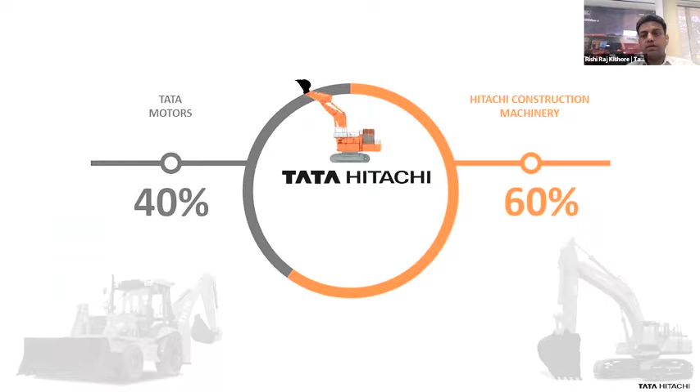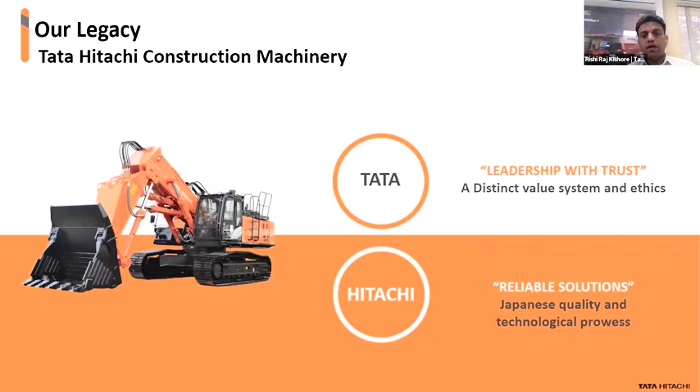Of course, the two big brands we are talking about, Tata's, they are known for leadership with trust in India, and Hitachi is known for the reliability of the products they manufacture. So these two conglomerates have come together to offer these equipments in India.

We are trying to cater to construction and mining. So as a company, we have focused on these two sectors which have been growing over the years, and we expect them to grow in the days ahead. In fact, people know that mining contributes around 2.5 to 3% of the GDP, so we directly and indirectly also contribute to the GDP of the country.

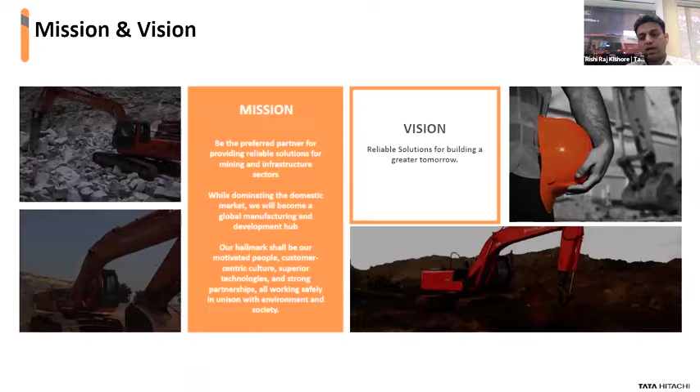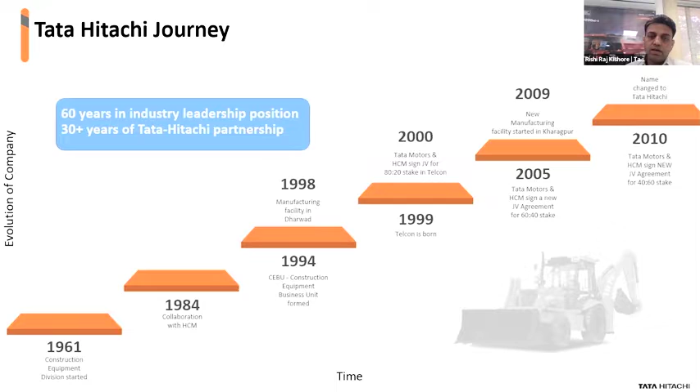This is how the company has grown since 1961. So being part of a small company or group, Telco, Tata Engineering and Locomotive Company in the 60s, and now we are a separate company. We have our manufacturing base in Kharagpur, and slowly, gradually the stake started increasing. It was only a technical collaboration with Hitachi, and now they own around 60% stake.

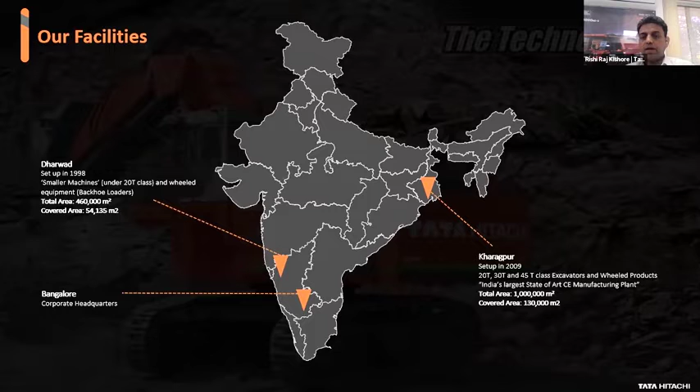The place where I come from, where I am operating from, is Bangalore, the corporate office. It's a head office, all functions operate from here. We have a factory in Dharwad, North Karnataka, and one factory in Kharagpur, which is the mining equipment factory. The idea of having a factory in Kharagpur was primarily because East India is the hub of mining. So we have a factory there. This is how we operate.

We have 6 regional offices, 28 branch offices. We also have dealers. Dealers primarily take care of the high volume products, which is the construction machinery. The objective of the organization is that every 100 kilometers we should have a touch point. So that's the way how we operate.

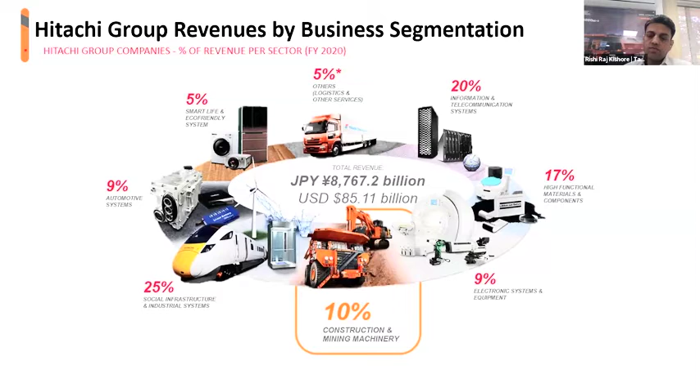A little bit about Hitachi. Like Tata's, they are also a very big conglomerate in Japan. They have stake in almost all sectors. Construction and mining machinery business contributes around 10% of their overall group revenue. The products they manufacture are primarily focused in Japan, being of Japanese origin, so this is the way they are spread.

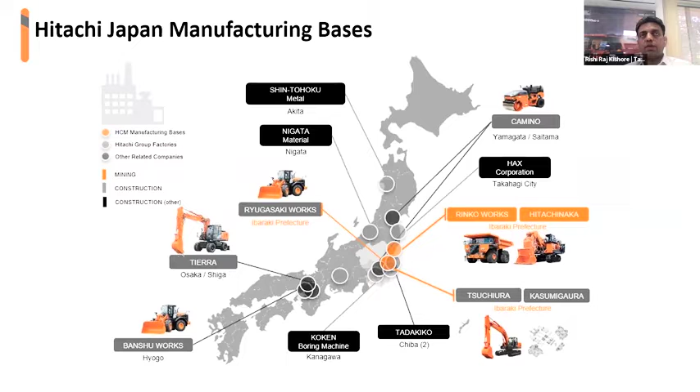And the mining products we talk about, if you see the highlighted one, the Hitachinaka - this is the factory where they manufacture the large class mining equipments.

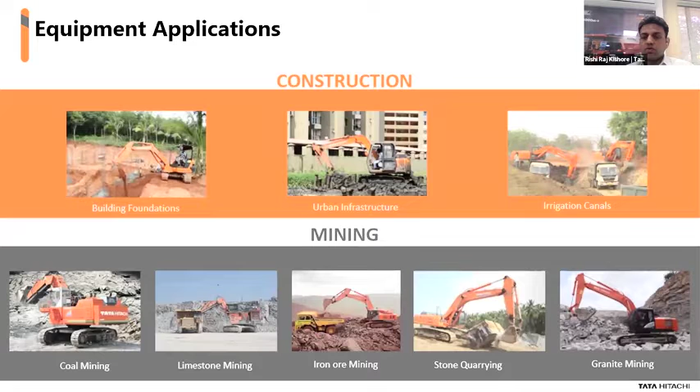Touching on the products, we are there in the surface mining or open cast mining space. We have construction - we cater to building foundations, urban infrastructure, irrigation. In mining, we contribute in coal mining, limestone mining, iron ore mining, stone quarry, granite, and so on and so forth.

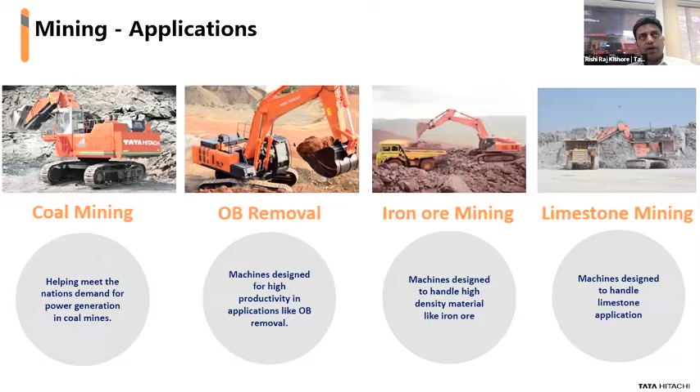The objective is that the competitive intensity is going up in the space where we operate. So the idea is to have more cost competitive products with a better life cycle. That's what we have demonstrated.

These are some snapshots of the products we manufacture in India. Now there are products we import. So when I say shovels, we manufacture up to 6.5 cubic meter shovels, 100-ton excavators in India.

That is the largest excavator, which of course is manufactured in India. Anyone else having that kind of capacity to manufacture? So we are doing that.

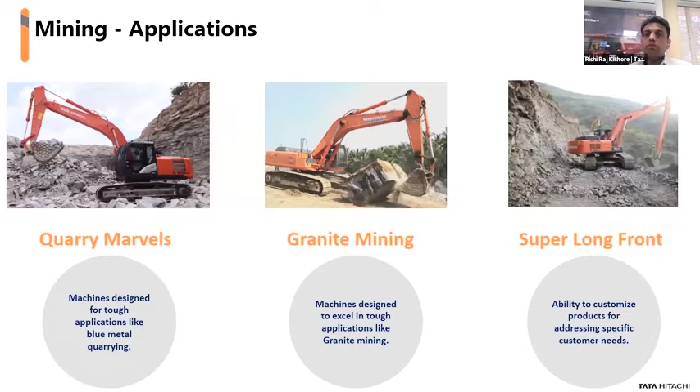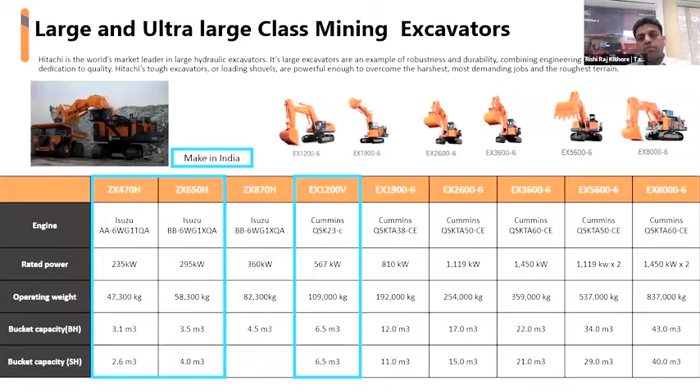Rest of the products we import. So we also have presence in trucks, the dumpers. So likewise, we have all capacity of trucks.

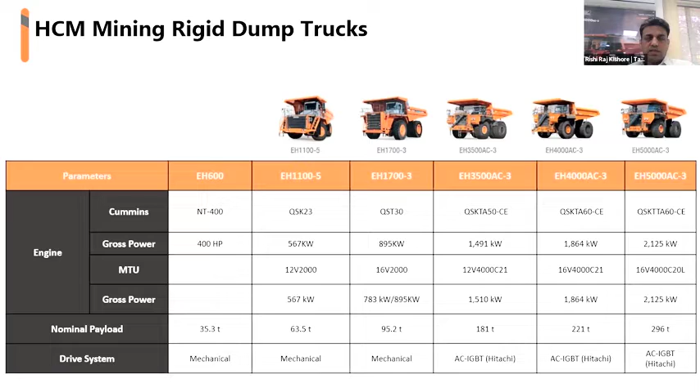Here, the role of technology starts slowly penetrating into it. So the drive system, what we talk about, the way if you have a car, you see you have a gearbox. So you put a gear, you engage a gear, and the car moves. So we have an AC drive truck. AC drive, when we see AC, is an electric motor, and this truck runs on AC drive motors. It is slightly different than the technology, but conceptually has been the case in the truck industry.

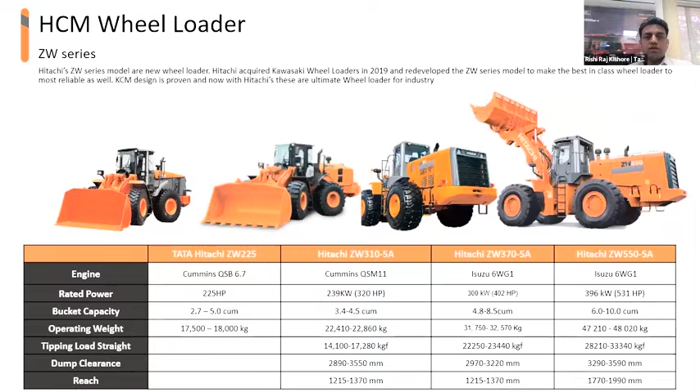We also have wheel loaders, all capacity of wheel loaders. These construction equipment spaces ask for many different types of attachments. So we also have these attachments in our portfolio.

Coming to the subject, as the technology has migrated, the objective has been to improve the efficiency of the equipments, also trying to control the emissions. Likewise, in case of automobiles, we are talking about battery operated cars or electric cars or battery operated two-wheelers.

Now this industry has existed for ages, and there have been electrical equipments running across various mine sites across the world. So those are available. And also, because of like the way we are talking in the automobile industry about emissions and carbon footprints, people started migrating from that, and engine efficiencies started going up. So in the line of that,

There are few products which have been rolled out, which talk about high capacity. When I'm saying high capacity, typically the capacity means the way the buckets are designed. So we are using engines which comply with the Tier 4 standard. Just to give you a framework, what Tier 4 means - it is the BS6 what is available in India when we talk about automobiles.

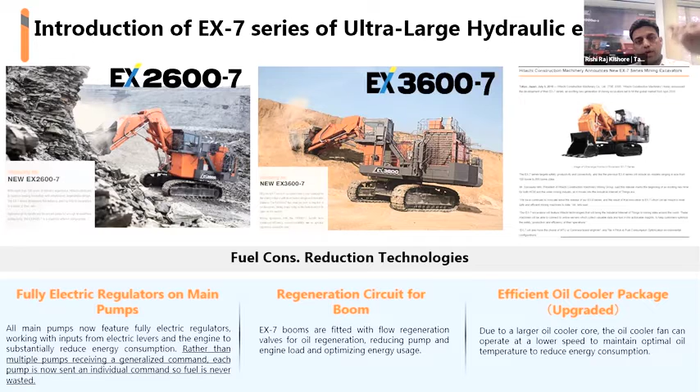These products reflected over here, the -7 models we are seeing, are the products which are coming up with those technologies. We are trying to control the fuel injection system. So when the fuel gets into the engine, we try to optimize the gases, and we try to use those gases, avoiding them going outside into the environment, pushing them back into the same system, trying to improve the efficiencies.

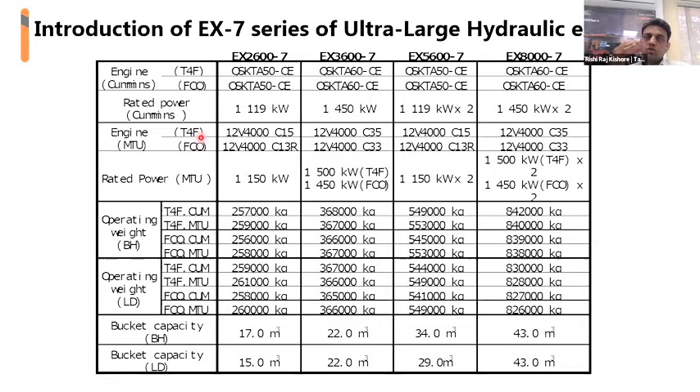So these are the few - like if you see this chart, we have a T4 engine. If you see, it says T4. I'll just take a pointer option. So the engine is T4F - this is what they say in the US. It is a Tier 4 or a Tier 4 Final, they call it. So emission-norm wise, it is one of the best engines now available, and there are people migrating these technologies to give these types of engines.

As I said, on these equipments there are electrical machinery or electrical options available, and these have been traditionally available, like the way we say in automobiles are actually battery run cars. They are not electric cars - when we say electric, you are using electricity for charging the batteries.

But in case of these excavators, the high capacity excavators, which traditionally have been working for maybe 2 decades now, this technology was already there. And we directly use an electric cable to power a motor which is fitted inside the cabin, inside the machine, which helps these machines operate in a mine environment.

In a mine, if someone visits, you can see a lot of smoke around. What happens is this smoke is nothing but dust. And when you add the engine diesel or exhaust gases coming out from the engine, it adds to the smoke, and the intensity of the NOx and COx goes up. So if we have these electrical machines in a mine, we can control some emission or some pollution in the mine.

And this gradually, in the last maybe 2-3 years, people have started accepting these kind of products in the mines. There are incentives that give encouragement to the investor who is investing in a mine, that they can have an option like this, which reduces the diesel handling part, if it is directly handled by the electric cable and all. Also trying to have cost optimization, because right now in India we have electricity which is slightly more economical as compared to diesel prices.

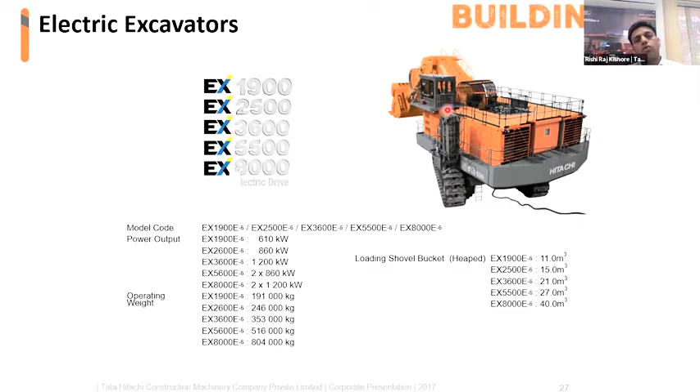So till maybe 2-3 years back, there used to be a controller which senses small activities which are going on in the equipment. Now those parameters which were there in the controller are available on an app. So this is what we have, Consite. This is a consolidated solution for construction sites, although it's saying construction site, it is used for mining also. All kinds of events which are happening on the machine, all activities which are happening on the machine, can be captured and downloaded through the controller.

Beyond that, this has now extended through cloud computing, as this data which is getting into the controller, through the server, or we call it a mobile communication device, gets into a third-party communication system which goes to the satellite, and it gets into the app. So we have an app to capture the data.

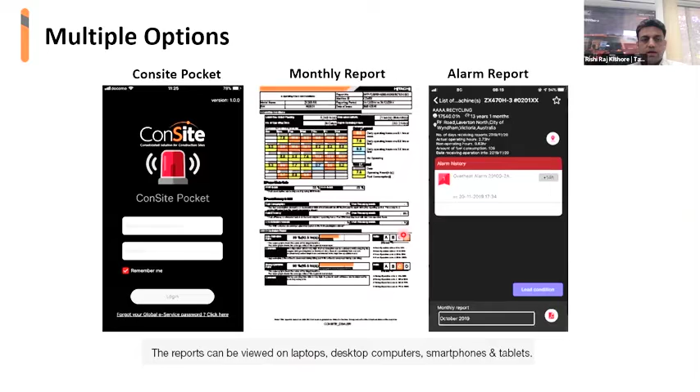Now this app, the facility what is available right now is I can log into the app and I can see what is happening on the machine, and it gives me an MIS also. So every month on a particular defined date, there is an MIS which reflects. There's a report available. Someone wants to understand how the diagnostics are, he can go to the app and investigate. So these are the kind of reports one can see, like alarms, and how much the machine has run. So those kind of parameters are available on the app.

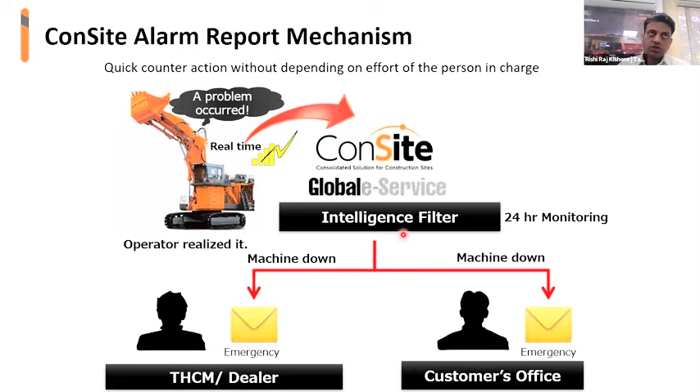Using this feature or this technology, the efficiency of the machine has improved. We have been monitoring this, so we have seen in the COVID scenario where our people were unable to access the machines, but having this app, sitting in the headquarters, we were able to see the machines are running, to what extent the machines are running. So things like those were available.

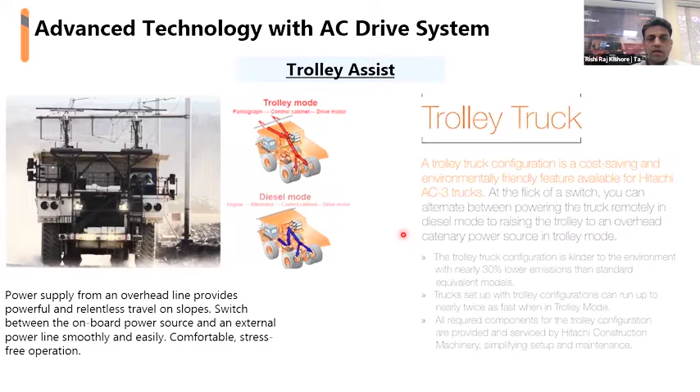And if we see these equipment run for maybe 15-16 years, and if a customer or user has such kind of facility available, the TCO, the total cost of ownership, can be minimized. Because right now, again going to the cost economics part, I'll just share this briefly.

Now, in a mine, there is an excavator, there is a truck. Now, these two particular category of products, if they understand each other, the efficiency also goes up. So there are GPS available. This is just a glimpse of it, how it operates.

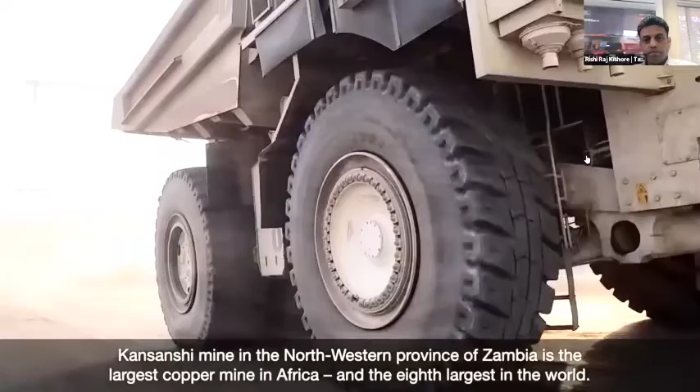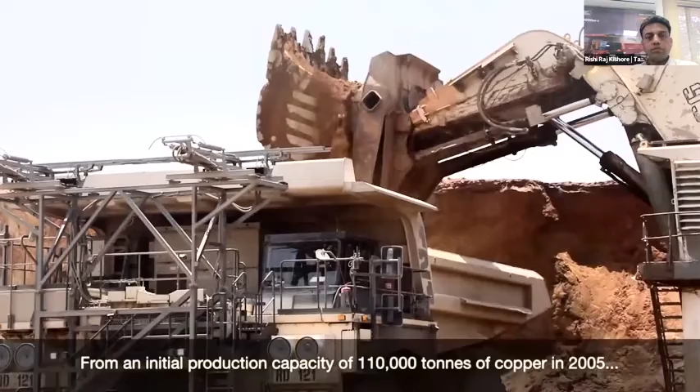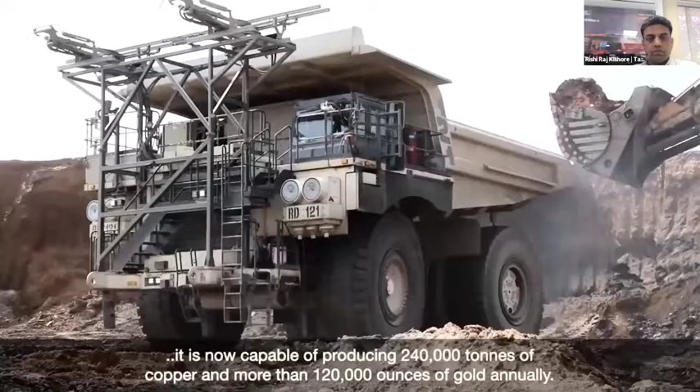Kansanshi mine in the northwestern province of Zambia is the largest copper mine in Africa and the 8th largest in the world. It has 1,700 employees and is owned and operated by Kansanshi Mining plc. The majority shareholding of 80% is held by a Canadian mining and exploration company, First Quantum Minerals. From an initial production capacity of 110,000 tons of copper in 2005, it is now capable of producing 240,000 tons of copper and more than 120,000 ounces of gold annually. Hitachi mining machines are supporting this development and are at the forefront of new and existing operations.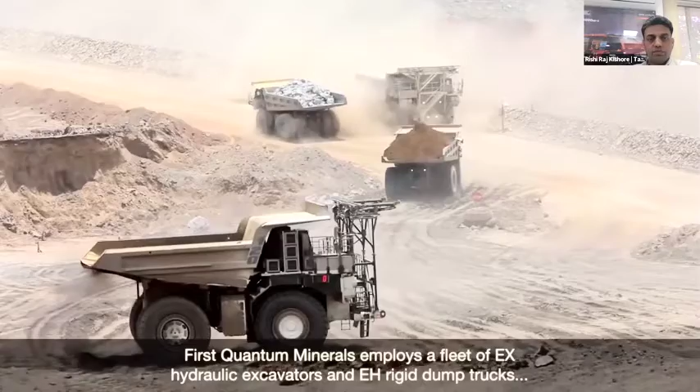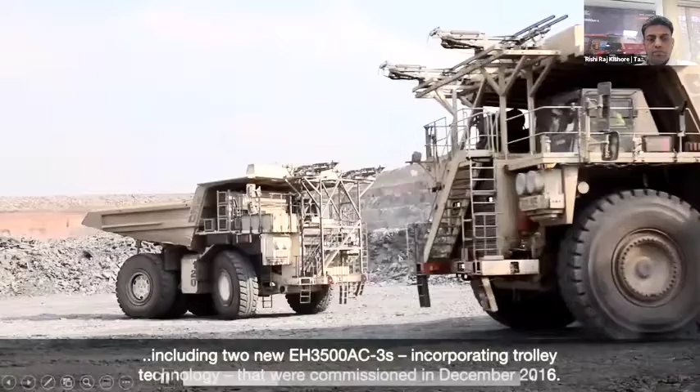First Quantum Minerals employs a fleet of EX hydraulic excavators and EH rigid dump trucks, including 2 new EH3500 AC-3s incorporating trolley technology that were commissioned in December 2016. These 2 EH3500 AC3 trolley trucks were delivered to Kansanshi mine at the end of 2016.

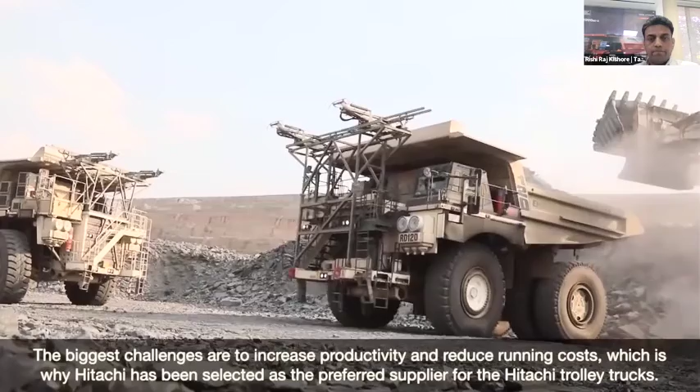This model is a whole new approach to the dump truck market and presents great opportunities for Hitachi and its customers. The biggest challenges are to increase productivity and reduce running costs, which is why Hitachi has been selected as the preferred supplier for the Hitachi trolley trucks.

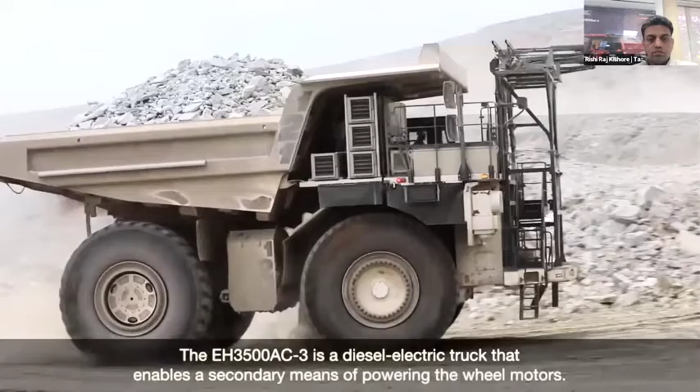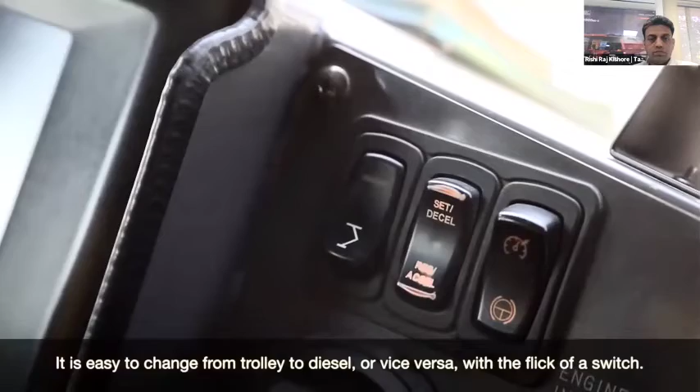The EH3500 AC-3 is a diesel-electric truck that enables a secondary means of powering the wheel motors. It is easy to change from trolley to diesel or vice versa with a flick of a switch. When this is activated, diesel-generated power is cancelled and overhead catenary power is connected and diverted to the wheel motors through inverters and trolley switchbox.

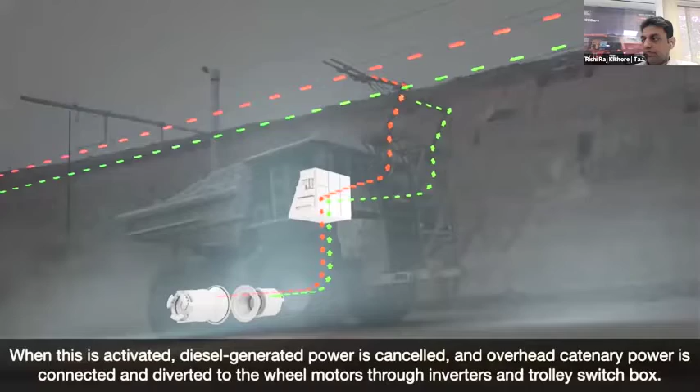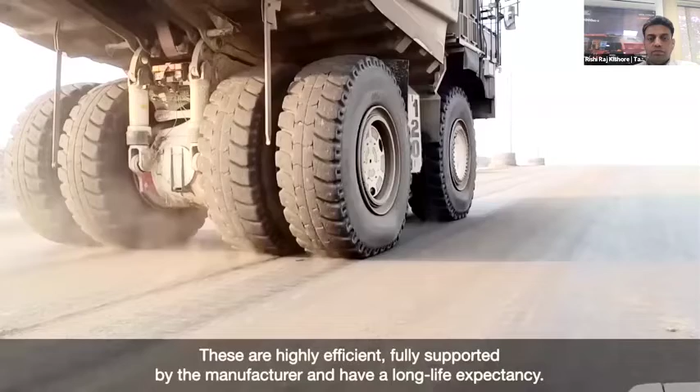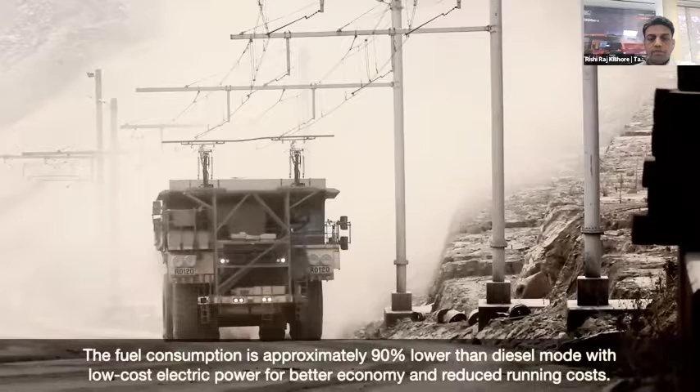All of the trolley-related parts on the EH3500 AC-3 are produced by Hitachi. These are highly efficient, fully supported by the manufacturer, and have a long life expectancy. The biggest advantages are improvements in productivity and cost savings. There is also a lower risk of downtime as they don't have a transmission or other complex components. The fuel consumption is approximately 90% lower than diesel mode, with low-cost electric power for better economy and reduced running costs.

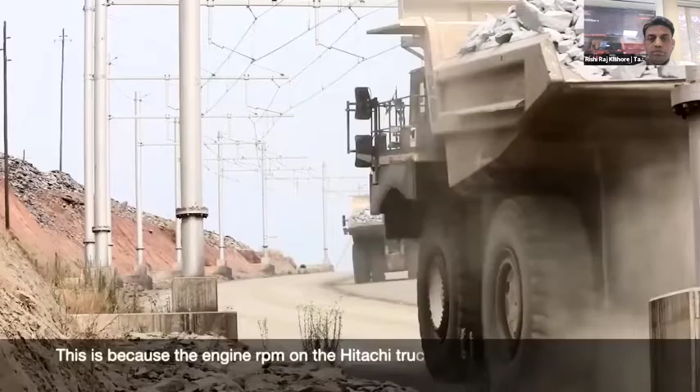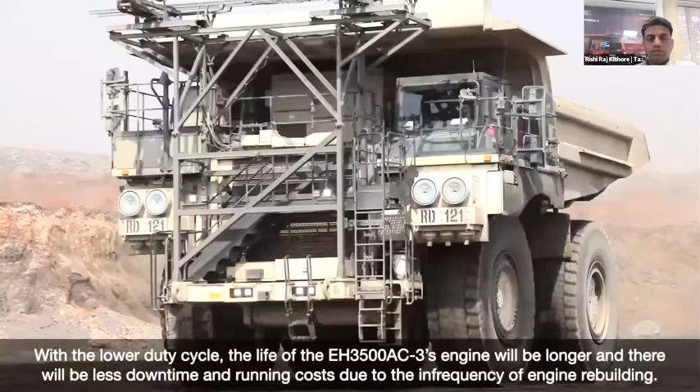When the trucks are under the trolley, you're doubling the speed that they would have done up the ramp, so it's a big time saver and a big money saver. This is because the engine RPM on the Hitachi truck in trolley mode is lower than any competitor's diesel-electric machines or conventional diesel trucks. With the lower duty cycle, the life of the EH3500 AC-3's engine will be longer and there will be less downtime and running costs due to the infrequency of engine rebuilding.

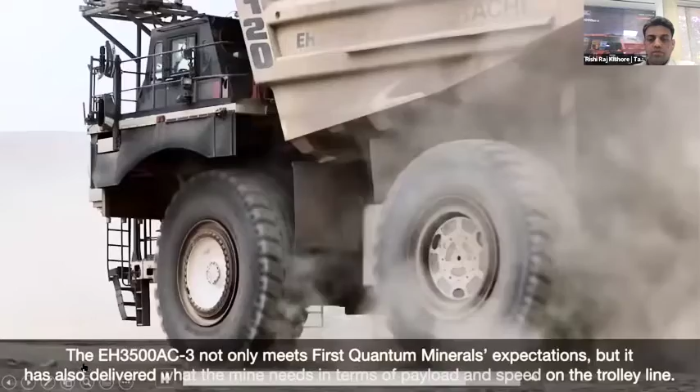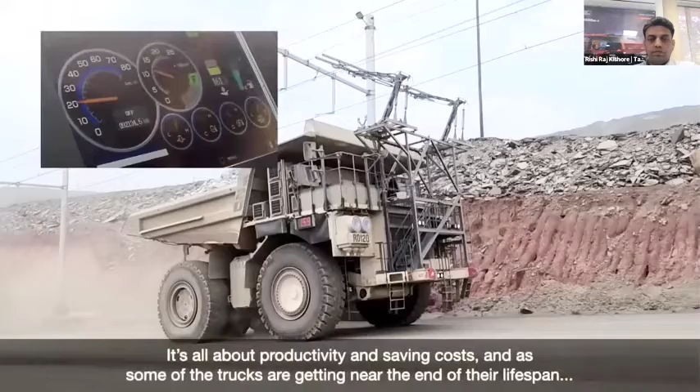It is also more environmentally friendly, with lower exhaust emissions and engine noise. The EH3500 AC3 not only meets First Quantum Minerals' expectations, but it has also delivered what the mine needs in terms of payload and speed on the trolley line. It's all about productivity and saving costs, and as some of the trucks are getting near the end of their lifespan, the mine will certainly be looking to the future with Hitachi trolley trucks.

Another thing which is now getting adopted is autonomous technology, where you don't need operators who sit and operate the equipment. When we are saying autonomous, it is manless, so there is no human intervention. Everything is geo-fenced through the GPS. You can track the machine, you can operate the machine, and so this is a thing which is now getting widely accepted.

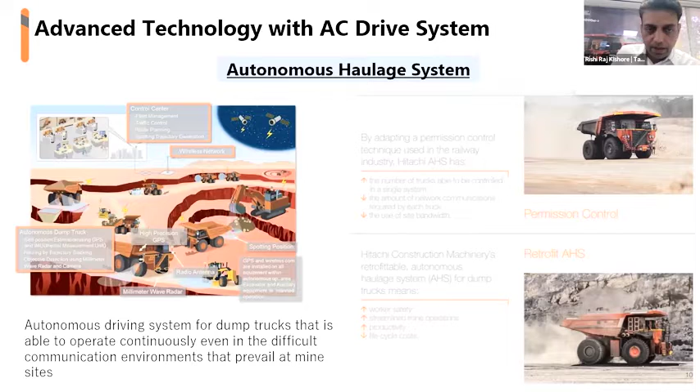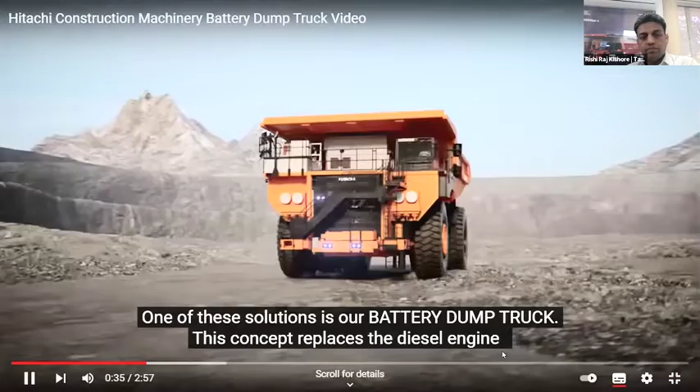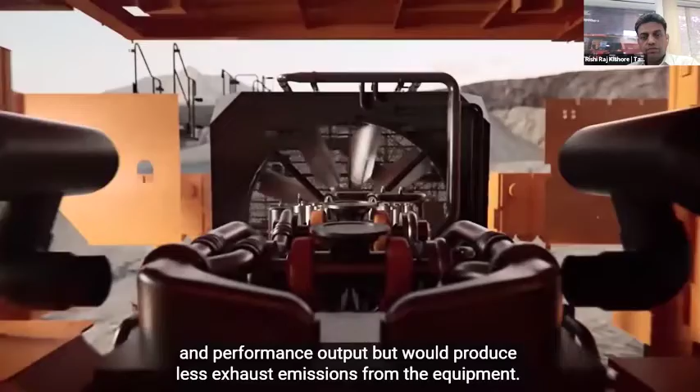Hitachi Construction Machinery is committed to the global challenges facing mining today, especially emissions reduction targets. One of these solutions is our battery dump truck. This concept replaces the diesel engine and alternator with an onboard battery system that would be capable of similar productivity and performance output, but would produce less exhaust emissions from the equipment.

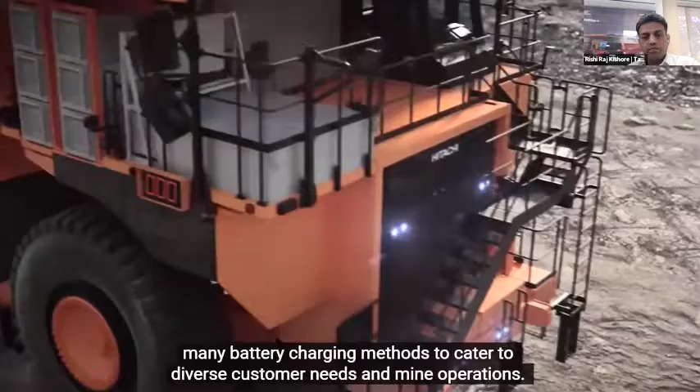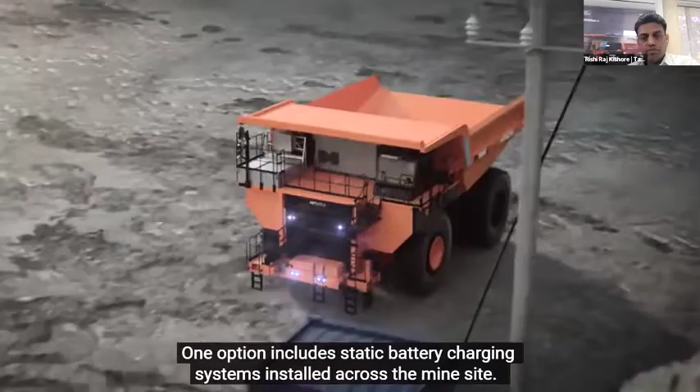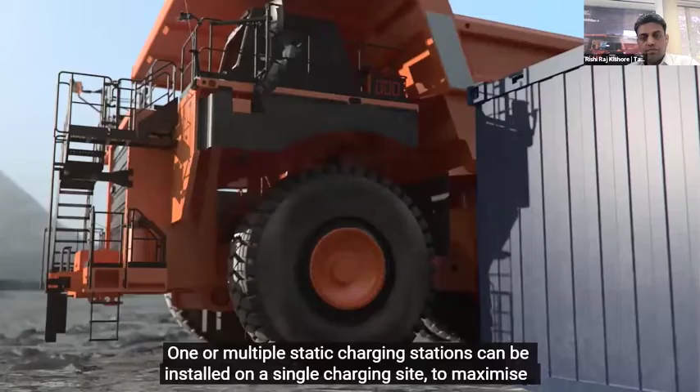Hitachi Construction Machinery and its partner ABB are also exploring many battery charging methods to cater to diverse customer needs and mine operations. One option includes static battery charging systems installed across the mine site. The battery truck simply drives up alongside and attaches to the charging station. One or multiple static charging stations can be installed on a single charging site to maximise productivity and recharge many trucks at once.

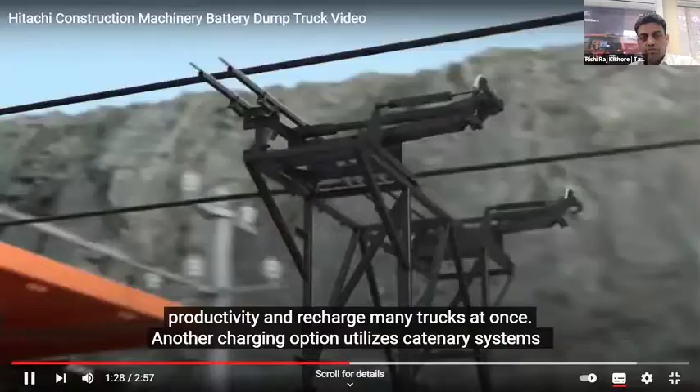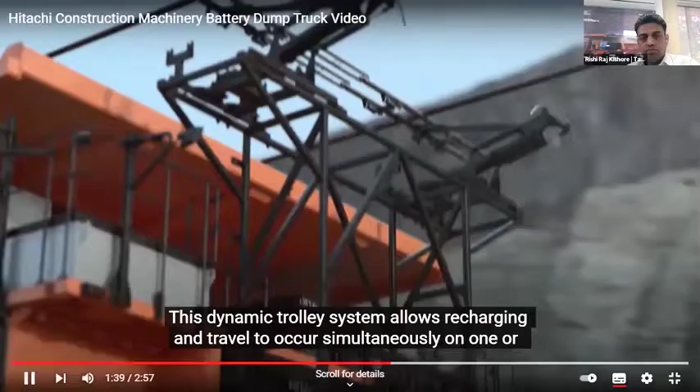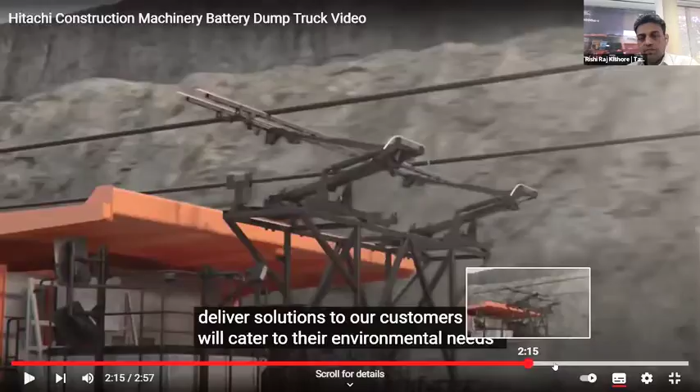Another charging option utilises catenary systems as an energy source. The dump truck uses a pantograph to connect to the power supply, adopting an already existing solution from our trolley trucks. This dynamic trolley system allows recharging and travel to occur simultaneously on one or multiple trucks, making this an efficient charging method. Methods currently in development will deliver solutions to our customers that will cater to their environmental needs. We are exploring various options for our battery truck technology, and preliminary work is underway to incorporate this technology.

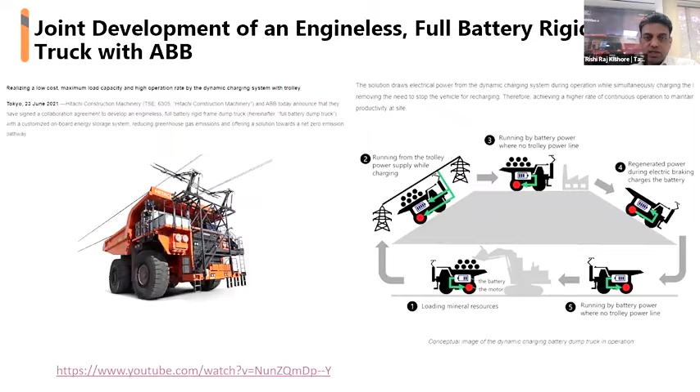Yeah, so that was a slight chapter. I just quickly ran through it because you already raised an alarm for me. So I'm sorry for overshooting my time by whatever time I have done. So thank you, that was all from my side. It was great, and thank you so much.